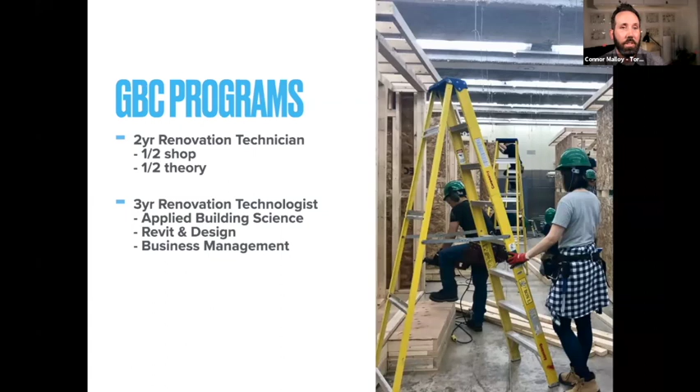And then we need to make sure they know how to make the money work. So yes, you want to build a passive home, yes, you want to achieve net zero, but can you make the money work is a really critical step for students to understand. That's kind of what we do at the college, and what I've spent so much time having fun with over the last 3 years. It's been a great place to spend my time.

So in the program, we teach carpentry techniques in a wood shop. We break down principles and teach all those hands-on skills, which is really great for every student.

So many students right now, and we see this a bit in the submissions today—you think about a trade school, the majority of our students coming into first year are 17, 18 years old. They have not come from a technical high school because there's not many of those left. So our schools are teaching really rudimentary skills at an early stage because there's such a massive need for training.

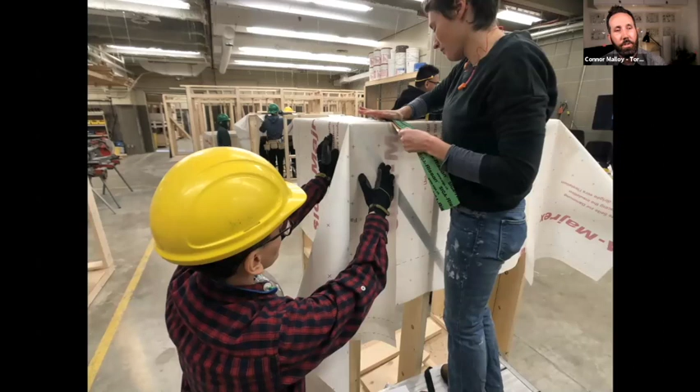So we do a lot of the early training before we can get into things like this, which is an applied building science course in the second year. You're learning how to frame walls, frame roofs, cut hips, and all the things Mark used to do as a framer. And we used to just tack on some kind of house wrap, give it an ambiguous name, and not know what it's for.

So it's really important at an early level, even when we're teaching first year framing, that we're talking about control layers. If you have details where you're wrapping headers for continuity, we're teaching that. We're not just saying stud layout, crown, layout in 16s, and fire it together—how to use a rafter square. The big thing I want to impart on everyone is how important it is to...

...put building science into each course, so it isn't this elective that you don't go to—it's in every single course. If you take framing, you're learning the building science of the framed envelope. If you're taking mechanical design, you're learning how to tape penetrations and think about balancing your systems. I think all that's really important, and something we're not perfect at—we're trying to get it into all courses so it's woven through the whole fabric.

We also then have, in the third year, students get a bit more information and can start to design their own assemblies. I think what we're trying to teach students is not to be a designer competing to say my ideas are better, but when you write a set of drawings, they feel competent that they can work through the issues, understand what is being drawn, and execute this.

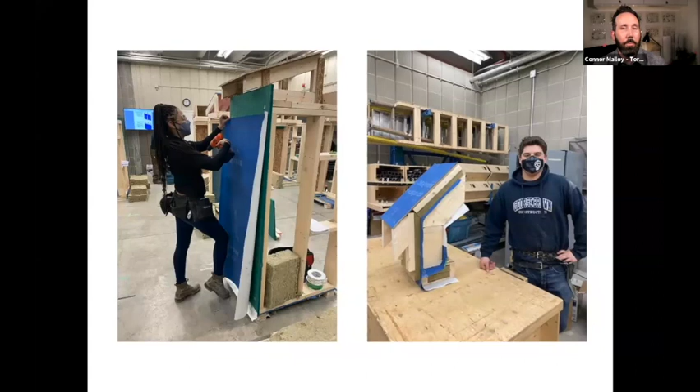I think that's what we really want to teach hands-on students who get it—they get how hard it is to put these things together. How do you put on 9 layers of Gutex or rigid board on the outside? It's a big conundrum. So building that mock-up and feeling confident is a big learning goal for us.

And then the other one is, when you have ideas, we want to make sure our students—every hands-on trade student should be able to draw at whatever level they can. This goes back to, it's not design for me, it's communication. Can you take, like the drawing on the right, done by a second year student with no drawing background—can they look at a 2-story assembly and show someone where the critical areas are where walls and floors connect? That simple skill, for me, having students be able to do confidently is really important.

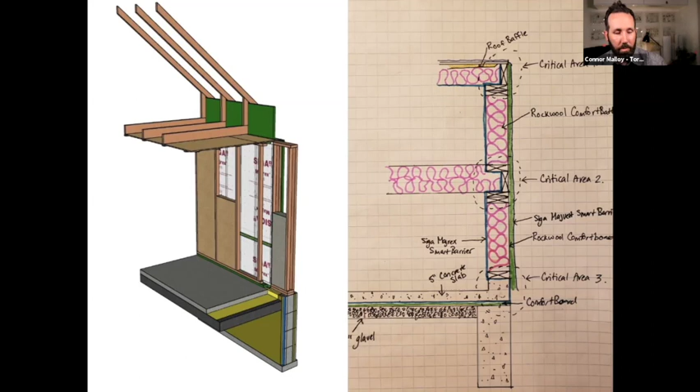And if we can get them to a place where they can start to actually break down the assembly of a house by building a quick SketchUp model to see how the layers connect and understand how all the flashing details work, that helps. A 2D drawing is very flat sometimes, and they need to know how you assemble it. So there's a lot of things trade schools are moving to teach, trying to put building science into each course, and making sure our students, once they're informed and aware, are confident enough to communicate their ideas to other people in a concise manner.

But we all know what happened last March. We weren't doing this anymore. The shops were empty. College closed March 17th, 2020. We didn't open for the whole summer, and we just opened last fall, but for only 10% in-person shop classes, everything else online. Realistically, we'll be online for theory until 2022. So that's really hard for us.

So at the same time this was happening, let's come full circle to the wall assembly. What Travis and those at BS and Beer, KC came up with, some beautiful people, at the end of February, right when things were starting to get weird, they launched this amazing competition to put a competitive spirit against wall assembly and building science. Travis and the group at BS and Beer, KC, came up with the Wall Assembly Sweet 16, which is like a March Madness for wall assemblies. They pitted 16 wall assemblies against each other and had a great discussion.

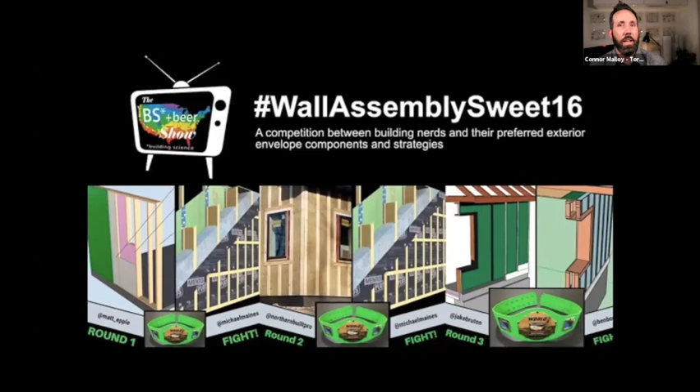So when I saw this come up, it's like, holy crap, they're doing it. This is what we need students to get excited about and know that they can enter. If you remember what architecture school was like for you, if you don't have fully rendered drawings or built examples, you feel like you can't compete. So this stuck out to me as a nugget we could think about changing. So why a student competition?

I like to give props where props are due every year. So we write people and say, listen, I call it my jealousy list - what am I jealous of? Contact that person, tell them how great it was, and ask can I help you when you do it again?

It's selfish, right? I reached out to Travis and said, hey, what you did last year was amazing. I want the students to enter it again - is the due date again in March? So I can get it in my courses and make sure we can produce entries. And it sounds like it's a lot of work to do. So Travis and I riffed quickly on how to come up with a competition for students that supported student work, full stop. Travis and the group at BS and Beer, KC were on board instantly.

And let's talk about what we came up with. So 2021 is when we launched the second annual - this is the Sweet 16 Student Edition. And really what we came up with, Travis and I kind of worked at nights and evenings and through calls. It was lovely to work with people that were so passionate about student learning that aren't in education. If we did this for students, it needed to support all levels of students.

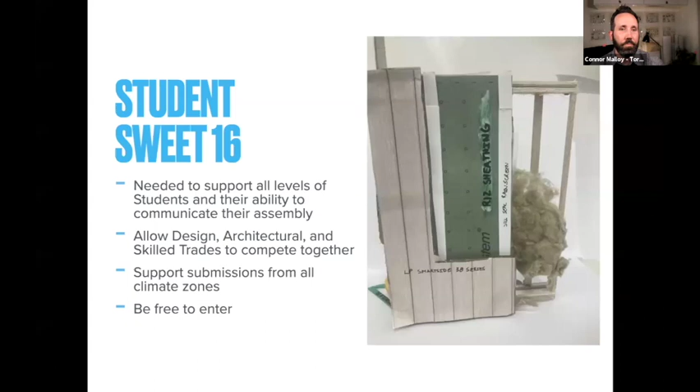So through some workshopping, what we came up with was 6 categories to give ultimate flexibility in what you did, but give you some way to measure what you came up with. So we wanted to make sure we measure performance. We want to make sure we measure buildability - so yes, you built this spaceship made of VIPs, but can you actually assemble it? Do you need a crane? What's that look like? Can you get the material at your job site?

Durability, it's a big thing. We thought trade schools could really champion this piece of it - how durable the assembly is you're looking at constructing. Embodied carbon for us is a really interesting topic to think about. Hard thing to measure, as we learned in the competition, but a good thing to think about. What does a high embodied carbon assembly look like against one that could be lower, and just have a discussion, just so we're aware and start to think about it.

Cost, obviously, something we have to think about. So what does your assembly cost to build in your own labor market with materials that you can access? In Ontario, we can access white cedar shingles pretty easily with our local sawmills - that's relatively affordable as a cladding system. Maybe down in Texas, you're importing those, that's expensive for you. So cost, again, is relative.

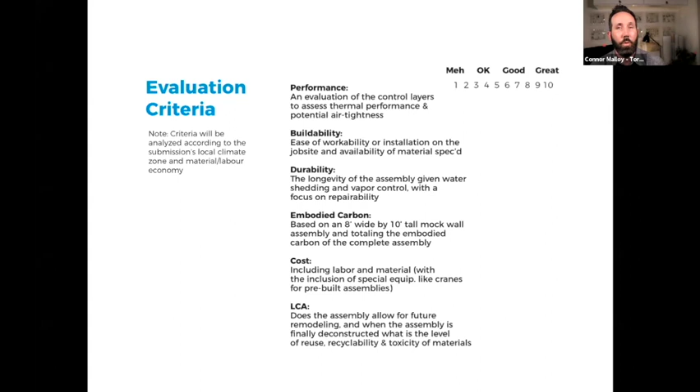And then we think about LCA as renovators and people who actually build and take them apart. What does it look like to renovate a structure that's full of wool, foam, dense pack, 9 layers of Gutex? What does that look like to take apart? At the end of its life, can you reasonably reuse these things? So that's kind of the matrix we had.

We launched wallassembly.com. We secured the domain, launched the competition quickly within a few weeks back in March. Got amazing support really early on. Travis was able to pull in Fine Homebuilding - they hosted all of our live discussions and events, really helped us get the message out there. And from there, really through our networks, we were able to line up an amazing group of judges: Mike Guertin, Christine Williamson, Matt Bloomquist, who's here, Steve Baczek, Ben Bogie, Jake Bruton, and Emily Mottram. So amazing group - it's what I would dream about as a student, to have people critique my work.

And that was fantastic. And then we had no idea sponsors would come. But when people hear about supporting students, everyone on this list, we did not have to solicit, we didn't have to ask - they all heard about it and offered. And it just became a bit more give energy to what we're up to. So Rockwool came on board, Fine Homebuilding, Emu Building Systems, Siga, Huber Wood, Intelligent Membranes out of the UK, MT Copeland, which is now just called Copeland, T-Stud, of course, and the Endeavor Center, and the Beam tool, which is a carbon accounting tool.

So this is fantastic for us. We figured, okay, we've nailed this, right? We're on Fine Homebuilding. We've got great judges, we've got great sponsors. But let me tell you, it is hard to connect with students.

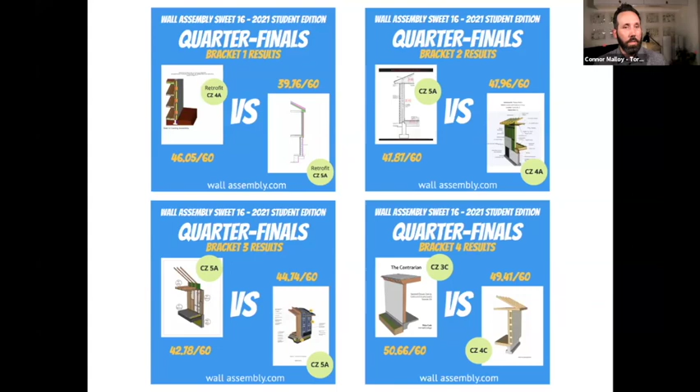And then audience feedback was also able to vote, and we got some great matchups. So right now we'll actually just dive into what the brackets look like, and we'll come back and talk about the summary. So let me just share my other screen.

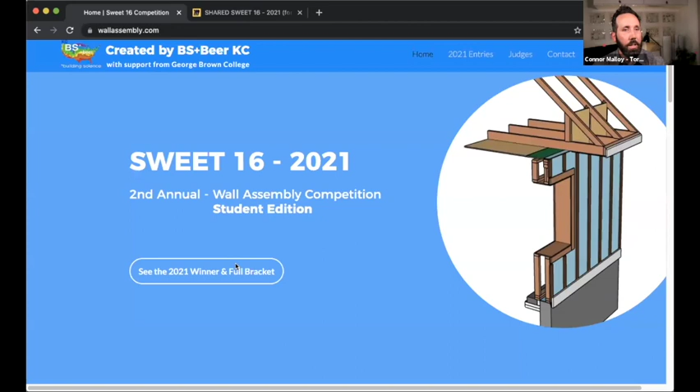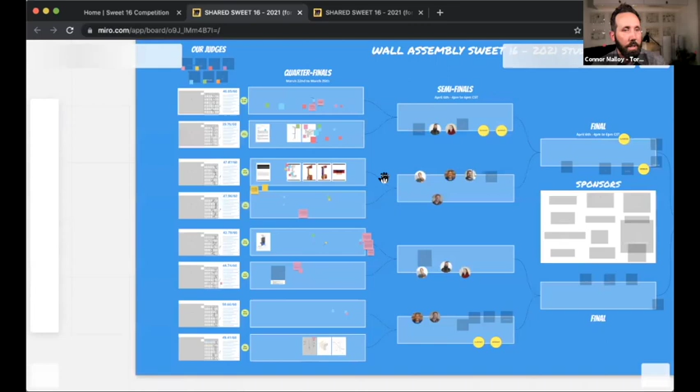So if you're unfamiliar, this is wallassembly.com. And when you're here, you can still see all of the live competition and all of the live feedback that was created by the judges, and see the student work. So what we did to make this all work is we built this using a design thinking tool called Miro, so it's like a graphic mood board. And if you zoom out, you can see the competition in like one slice.

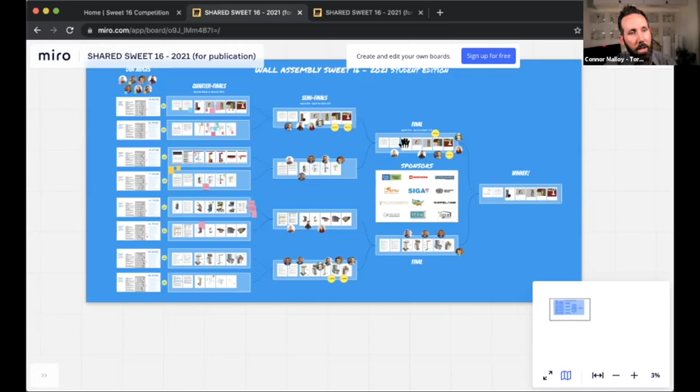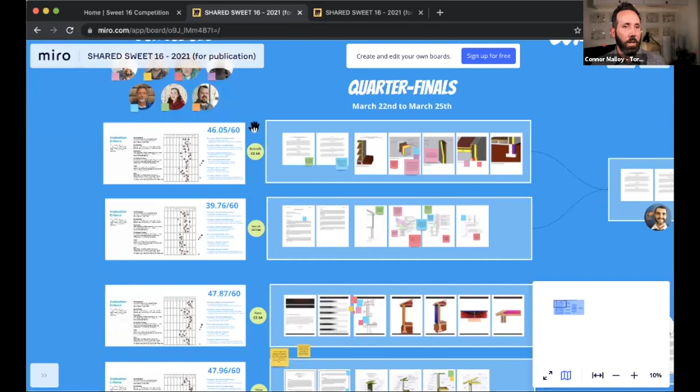So here's the quarterfinals - these are all of the 8 entries by the student groups. Those are whittled down to one winner out of each bracket to create the semifinals. Then we had a final event. Because there's so much to cover here, we'll talk about the high level of each submission and generally how they scored, so we can get to the end and listen to our students.

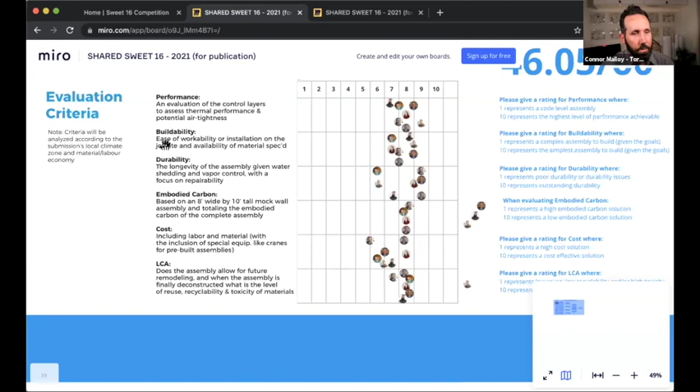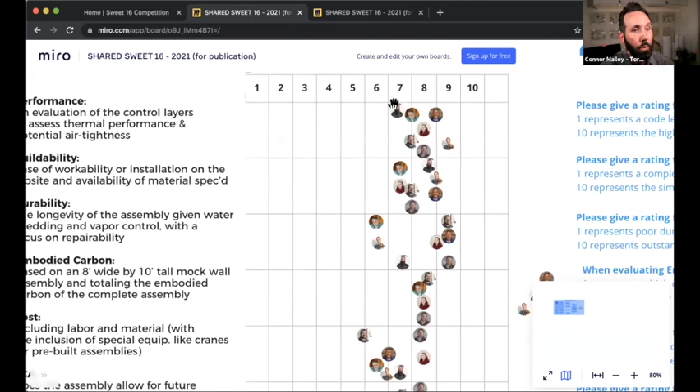So what we did is we kind of took to make the voting really quite playful. If you go in later and look at this, each criteria had a 1 to 10 rubric, and all of the judges' faces were turned into buttons, so you can see how the 7 judges voted on your work, and compare that across submissions, and see how they thought about your control layers, your durability. Also understand - is someone like Ben Bogie, who's a builder, looking more critically at durability? Is someone like Christine Williamson, who is a building science expert, more concerned about performance or durability? Those are interesting things to look at for how the judges are voting.

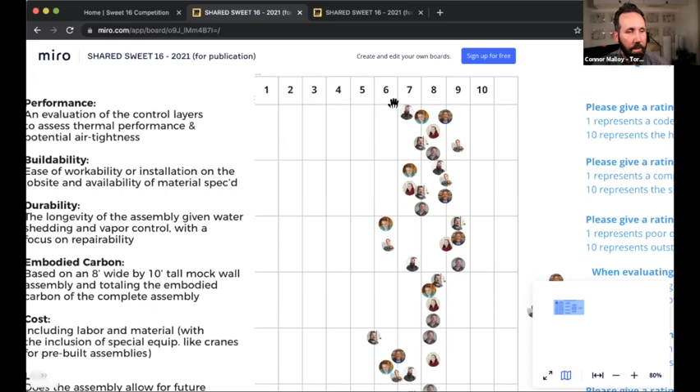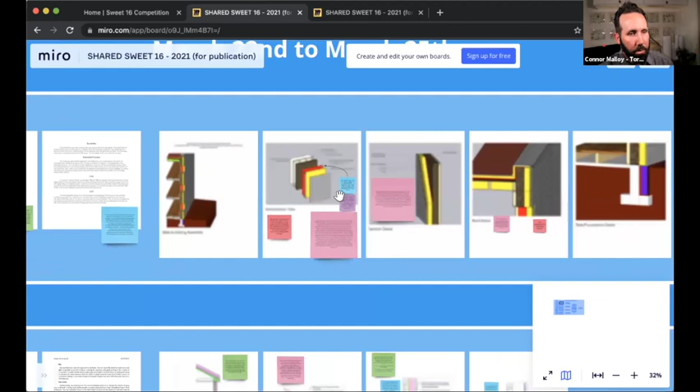So we thought that was quite fun, and all of this was done up front. The judges then also had the ability to provide detailed and descriptive feedback. Each judge received a sticky note, and under each submission they were able to write feedback. So this is actually Dylan's, who is here tonight. To get feedback from people like Christine Williamson in such detail is just incredible.

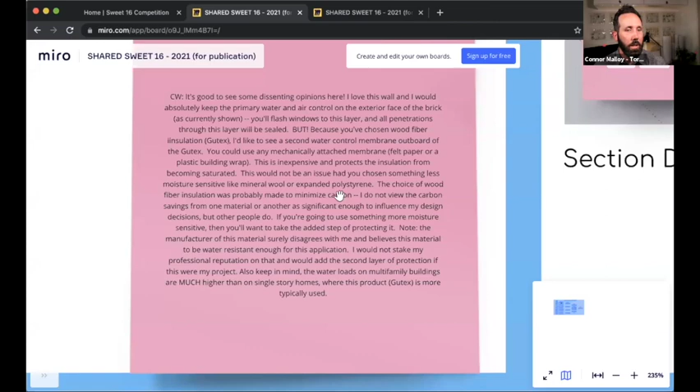So this is all part of that first round. So let's kind of look at the sort of general matchups.

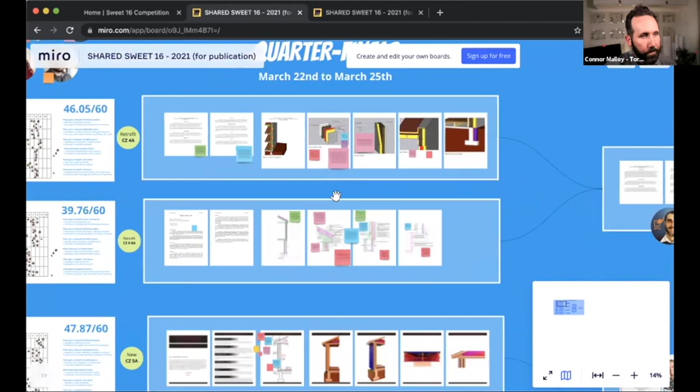Okay, so the first round is we had two retrofits submitted, one from New York and one from Toronto. The New York retrofit is of a 3-story multi-family dwelling or multi-family building, in climate zone 4A. Even though Toronto is a bit further north, we're only in 5A, so it felt like a good matchup to put those two against each other.

The submittal from Toronto is done by a student who is in a continuing education program at a local university. And the top submission is done by two high school students in New York. Really incredible to see the ideas coming out of this.

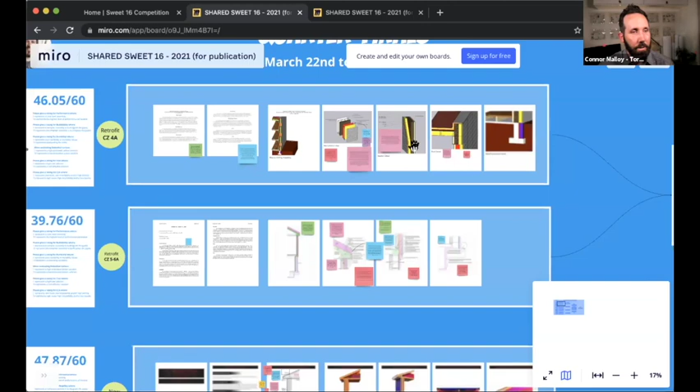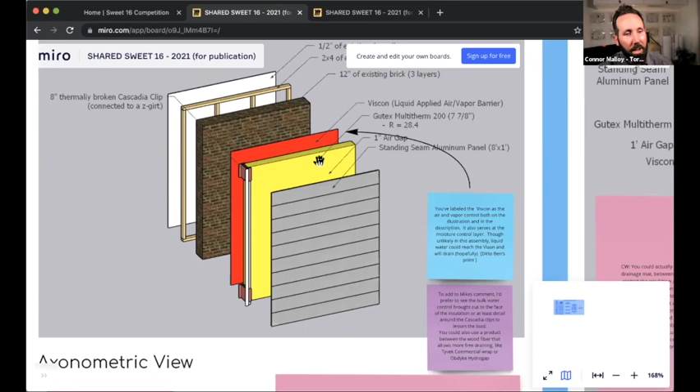The detail in New York for the assembly is to take that existing masonry building and basically laminate on the outside, outsulate on the outside and build that assembly. So what they've got is really adding Gutex, and there's a really healthy debate. If you want to see debate about Gutex as a WRB, go look at the live recordings of the competition. Really interesting here as sort of an outsulation installation.

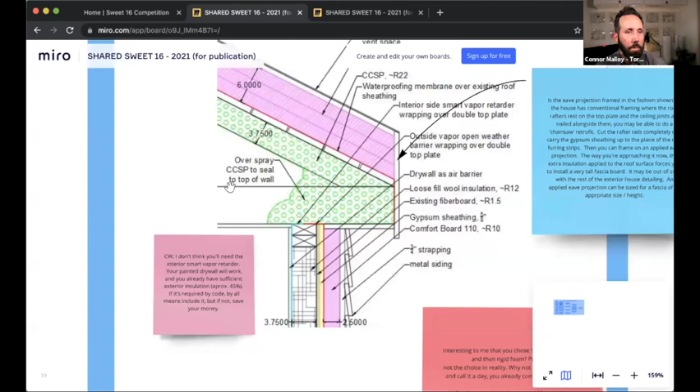And then for Toronto, a lot different. This is a renovation of actually this student's home. They looked at renovating the interior, which is more conventional, using more conventional assemblies with rigid foam and spray foam in the headers and up the end of that truss. This really solicited great feedback from builders and architects about details of using a raised heel. These things that we might know as being common, but to someone who's 19, 20, these are kind of new concepts.

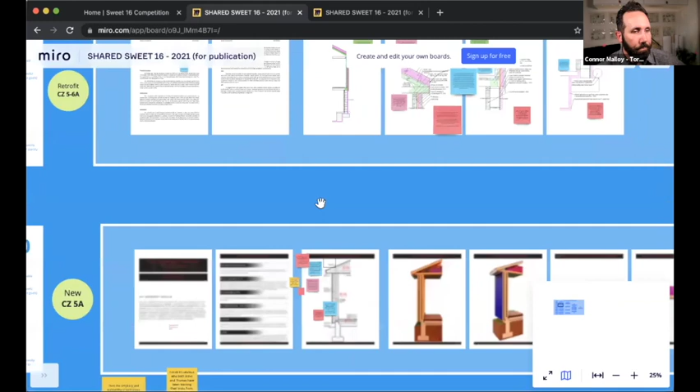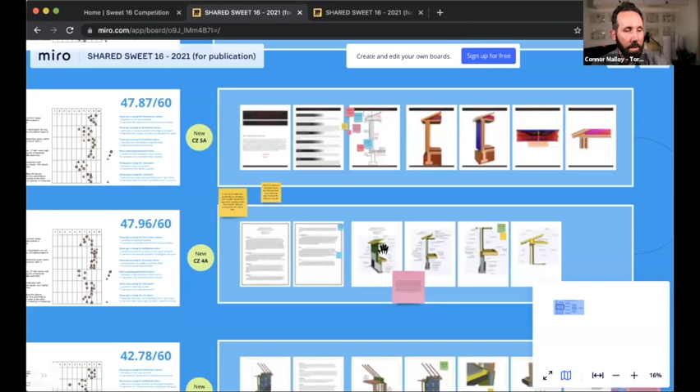So the next matchup we had was two wall assemblies out of climate zone 5A and 4A. The top submission is done by an architectural student, and the bottom submission that actually won is done by a high school student who's in an applied trades course and builds a real house with his teacher. Like, you can't make this stuff up. It's crazy, and really interesting submissions.

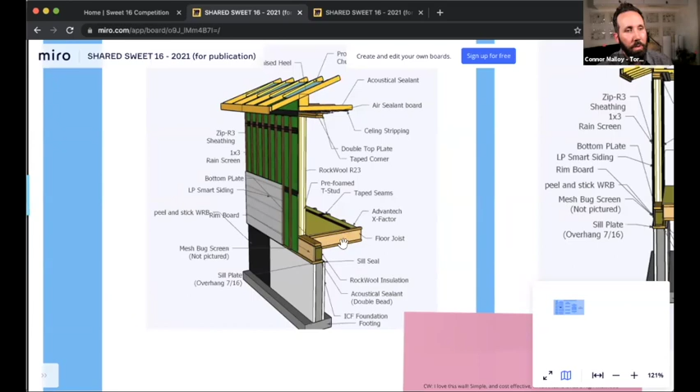You've got, again, a raised heel truss. You're seeing a T-stud on the outside of the wall with zip R on the exterior. They've got an ICF foundation. And this really kind of brought up a lot of good discussions of embodied carbon and thinking about what that means, and should we listen to it, right?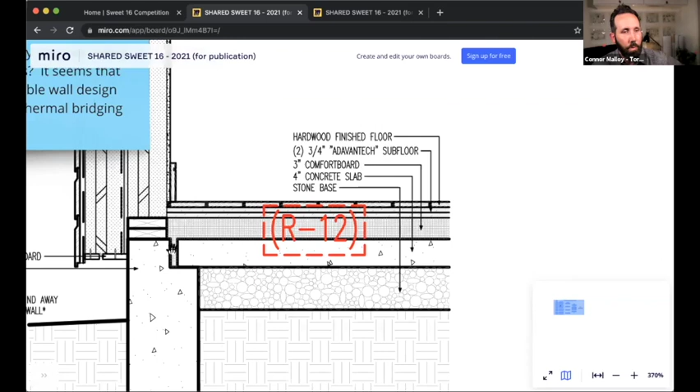Different assembly up top. Again, this is a T-stud wall. It's built as a Larsen truss. It's insulated with Havelock wool. Has a raised heel truss, nice detail. And then in this instance, they're insulating on top of the concrete floor. So it's gravel, 4-inch slab, and then they're insulating on top of that with a thermal break at that foundation wall. These are really just fun ideas to see what students can come up with.

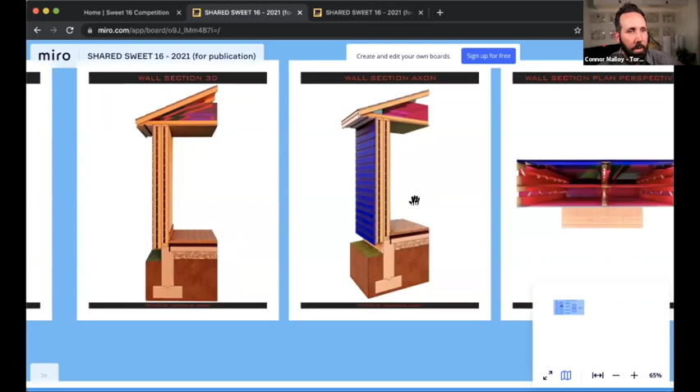And you see all different levels of rendering ability against different disciplines and schools' abilities.

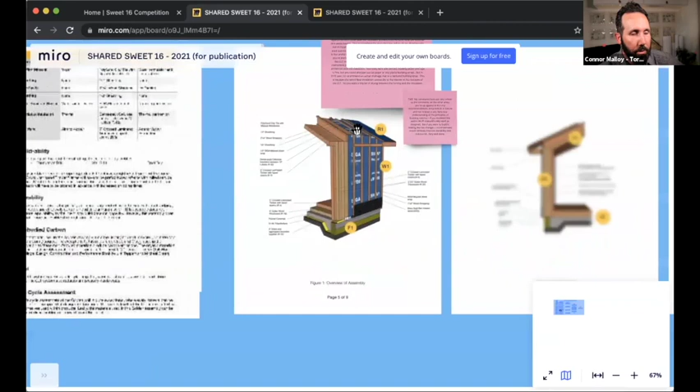Out of Toronto, we got two 5A assemblies. One is the Golden Wall, which we'll just jump to down here. This is a really fun assembly that got a lot of interest and was torn into by judges. It's a CLT assembly—they have a CLT floor system, CLT wall system, and CLT roof system. That's then outsulated with Gutex on the exterior walls, and then the roof has basically like a Larsen truss style blown in with cellulose. And they're insulating under the slab with Glavel insulated drainage layer.

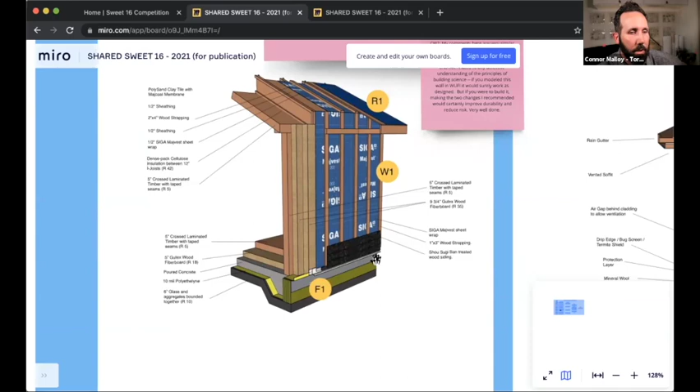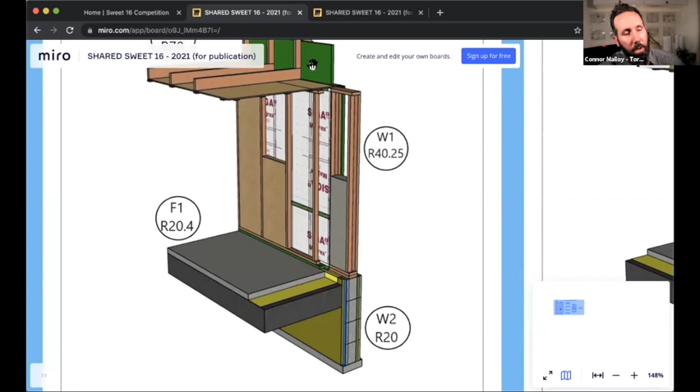Up top, we've got another assembly here, also out of Toronto. They're using a T-stud on the exterior walls. They've got a service cavity on the interior, which they fill with hemp insulation. The actual thermal assembly on the exterior is the T-stud filled with dense pack, and they add a continuous insulation layer on the exterior with a wood fiber board. Their under slab is 12 inches of Glavel with—let me recall the control layer—the 15 mil Stego Wrap, wrapped down into a cellulose-based wood block foundation. So really, really fun stuff.

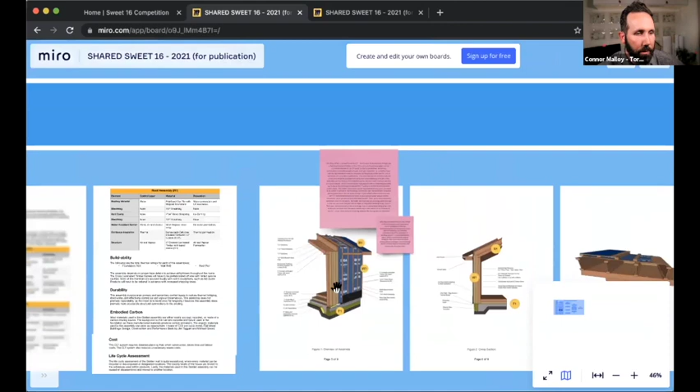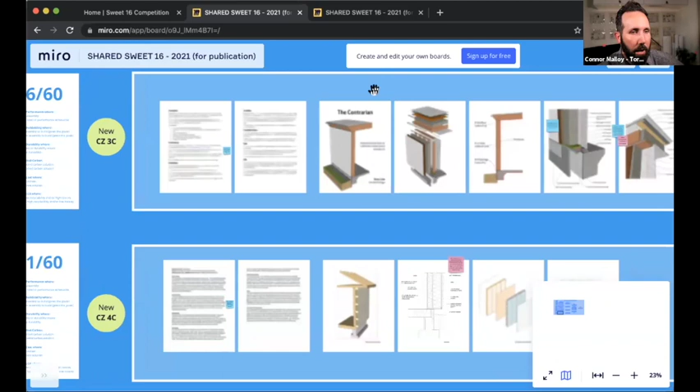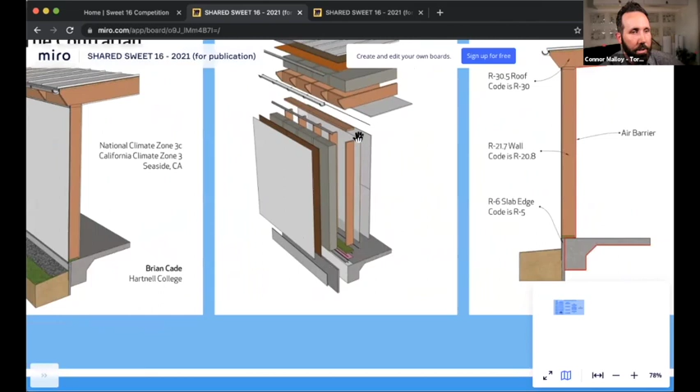The last two submissions are out of warmer climates than us—climate zone 3C on the West Coast and 4C. We had the Contrarian, which I believe Brian's here with us tonight, a nice, lighter approach coming from someone used to colder climates in how they were dealing with this. They actually used painted plywood as the big differentiator between it and its rivals, with a standard insulated assembly for the wall.

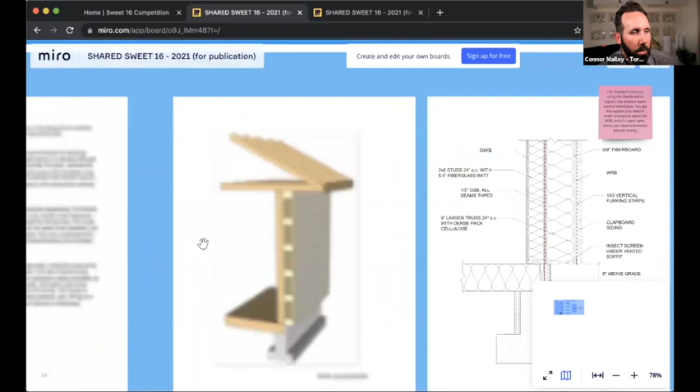And then down here, Climate Zone 4C—this is out of a university, an architectural university on the West Coast.

A 2x6 exterior wall, Larsen truss, filled with cellulose, and then tied into an ICF foundation at the rear, and then a non-raised truss and non-insulated roof assembly.

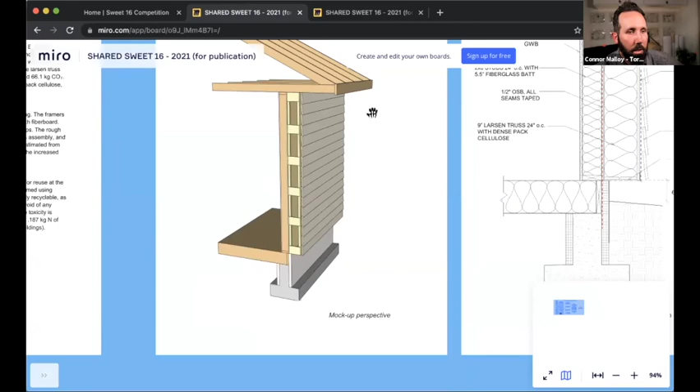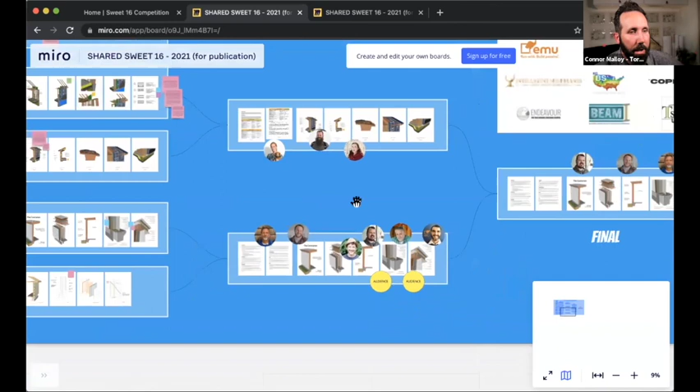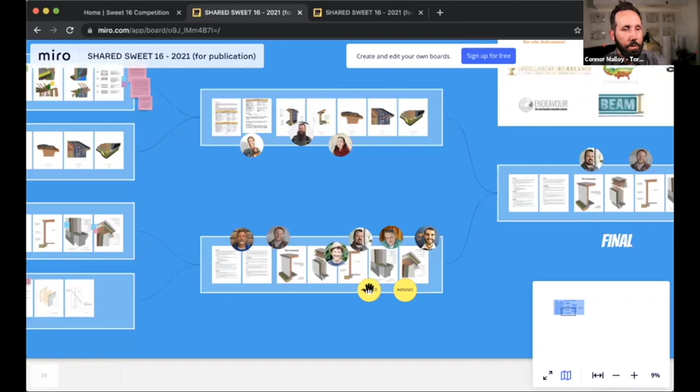So really nice detail. What the judges did is they voted on each category. We were able to score and then choose winners. And that allowed us in the live final to have the students present their ideas. We learn about the modeling. The judges then voted on really what their pick was. And we, the audience members, also got votes, and we counted their votes as well to figure out who won.

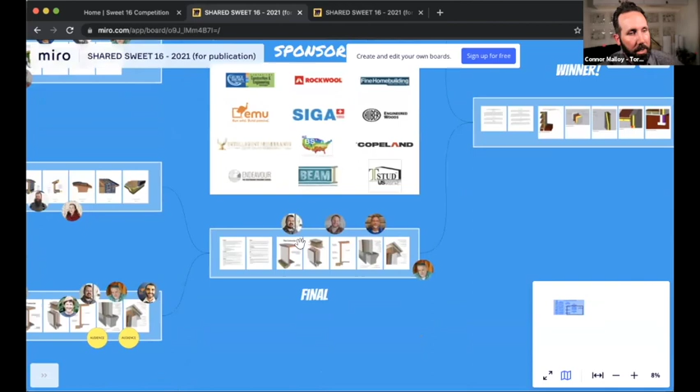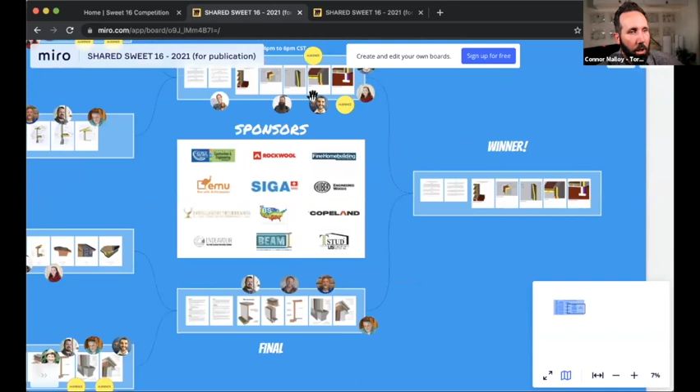So in the final event, we had a retrofit out of Climate Zone 4A in New York against a really smart assembly, the Contrarian, in Climate Zone 3C, Southwest Coast. And it was a battle to the end. What really came out was a lot of interest in high school students pursuing a retrofit, which is harder to do than building a new assembly, and thinking about what that means to look at old building stock.

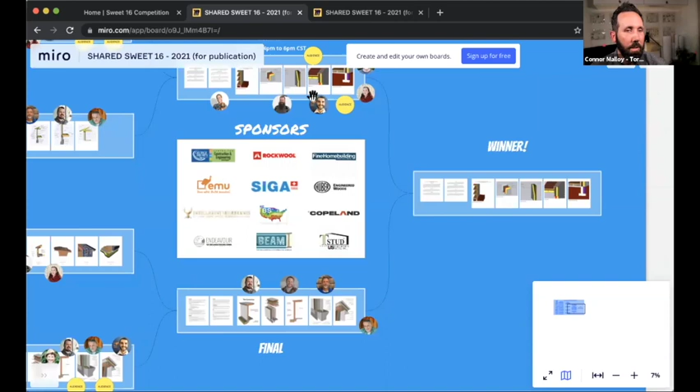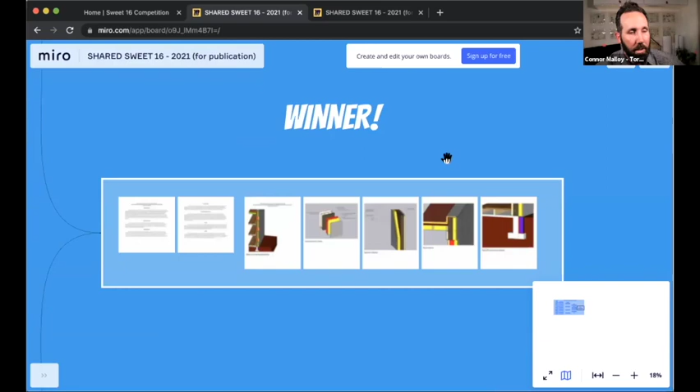So I think the winners are here with us tonight, Dylan and his partner, which is exciting. For me, this is what it's all about. We made a competition internationally for students, and two high school students beat out trade school students with formal building science education, hands-on, architectural students from various universities who had help from various people. It shows you how exciting and how early we can start with students and learners to teach building science, even at a high school level. So I think that's really important to think about.

So we'll dive into that in a second. I'm just going to wrap up here, and we'll get into the assemblies with the students, about what we kind of learned from this. So the one thing we learned, and I say this as someone who teaches in a school and feels connected in some way to the community, is connecting with students is tough. With an individual student, even with star-studded judges and supporters and having great promotion, connecting with that person who's 17, 18, 19, 20.

Who's not following, who's not reading Fine Homebuilding, who's not looking at all of your amazing publications and your companies—how do we connect with that student? Because that's how we support their learning. Number two, what we learned is we really don't, as a group and as a community, have a list of all the schools teaching building science in North America. And that, I think, is something we need to come together on and think about—who teaches building science in any degree, hands-on school, interior design school, talking about solar gain. Who are those schools? So we can start to share information with them and support those teachers. And when we have competitions like this, make sure we're soliciting a larger audience—that would be really helpful.

The other thing we learned is, to get schools on board and to support students, we need to not launch this in the winter. We have to launch it in the summer before, so that those teachers who come in on a contract can actually institute it as one of their shop or course projects. We can support them through documentation or resources, and they can hopefully have students feel comfortable submitting something in March the following year. So that's really what stood out to us as takeaways, because I think there's so much here for us to help promote, and it really comes down to us as a group figuring out how we connect with those younger people in our communities who need help.